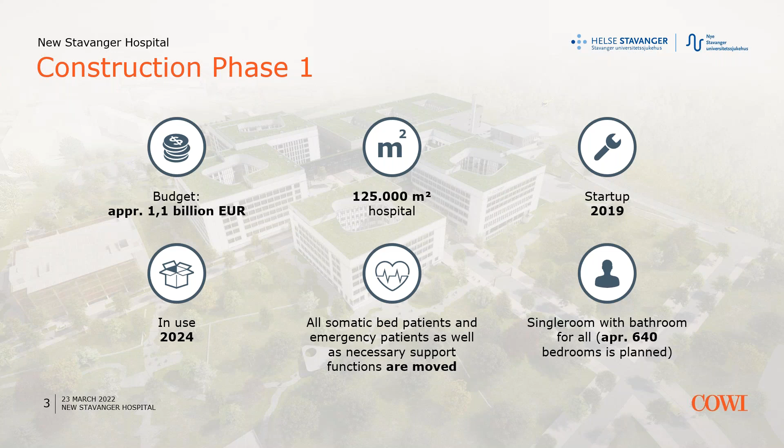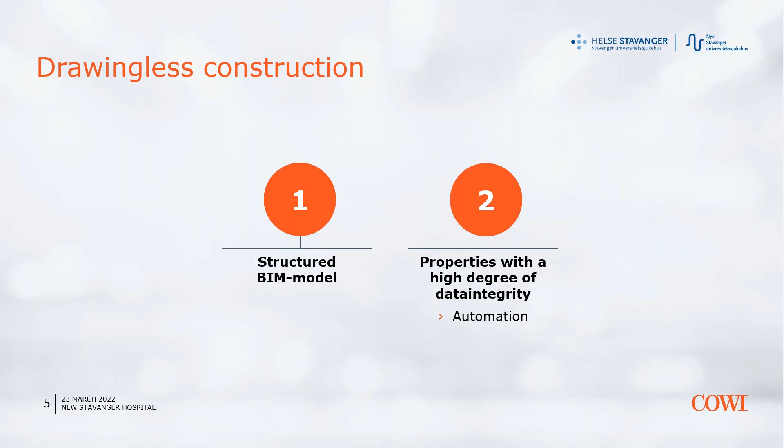Here's a drone picture of the building site, how far we've come by now. In the project we have a very structured BIM model, and we have a lot of properties with a high degree of data integrity. That helps us a lot with automating a lot of the processes in the project. We can filter all objects on certain parameters. So this is an example of data integrity for the control area. The whole building is split into control areas, which are part of a floor. So here we can see all the objects which are inside one control area.

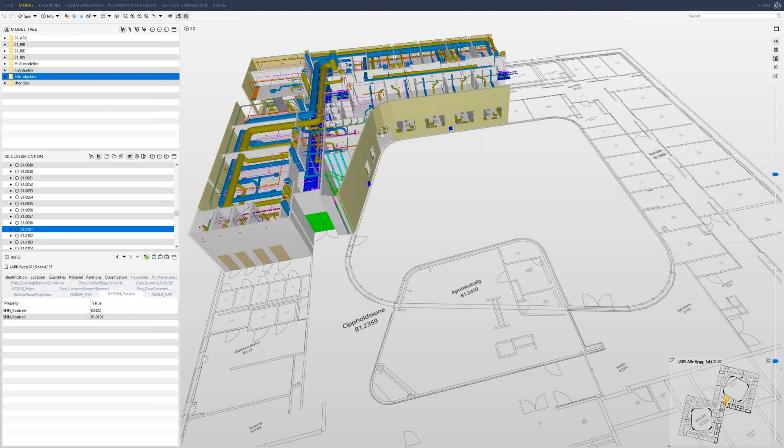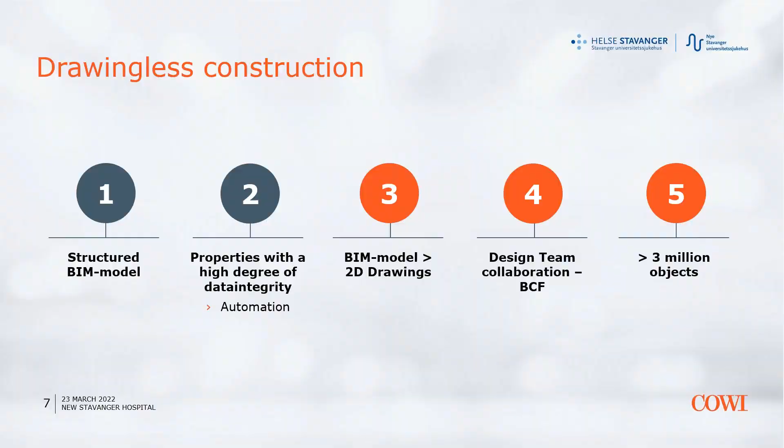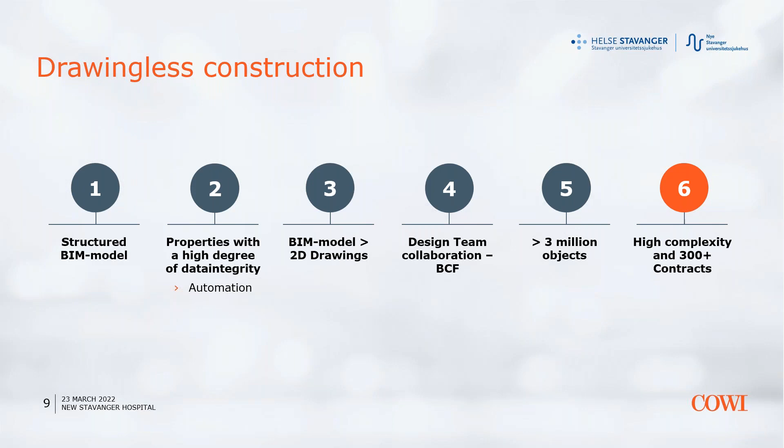The BIM model in the project has a higher rank than the 2D drawings, and the design team collaborates through BCF. And the project has more than 3 million objects. So you see here, there's a BIM model with all the buildings in the project. It's a huge project. It's also of high complexity due to more than 300 contracts, where 150 of them are affecting the construction, and there's another 150 for medical equipment. Here's a picture to illustrate some of the complexity, and this is before the electrician got started.

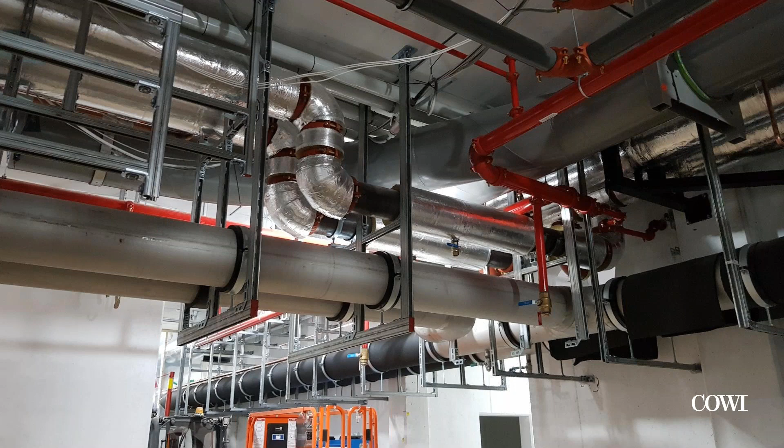We also use laser scanning to check deviations for openings, etc. And here you can see what looks like the concrete floor here is the scan, and the green piping here, that's the BIM model. And as you can see here, there's deviation between where the opening for the pipe is placed. So therefore we can check these deviations before we mount the pipes in place.

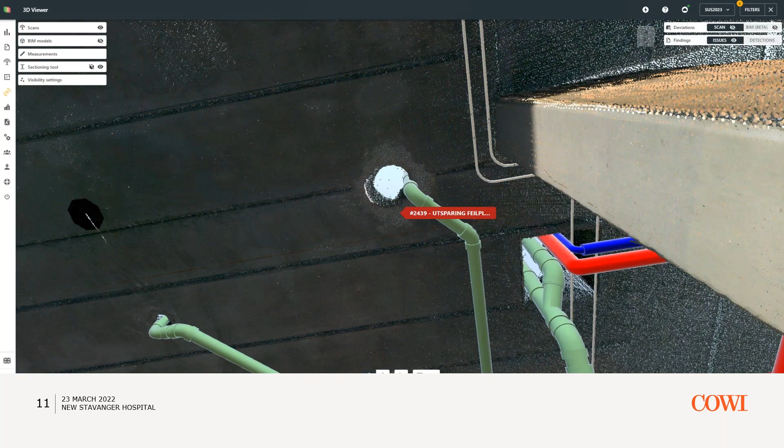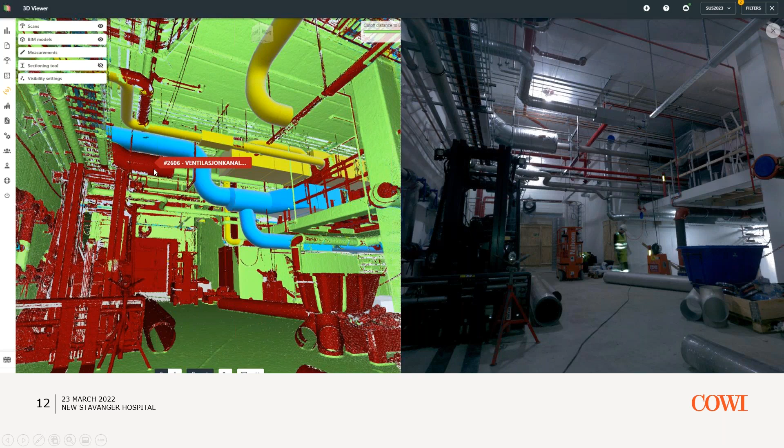Another example is for installations, where you can see the ventilation channel here, which is modeled in blue, and the way it's placed in the building site is here in red. And here on the right side, you can see the picture of the pipe. So therefore, we can easily check whether things are placed according to the model or not.

So, Eirik, you will continue. Thank you for the presentation, Henrik. I will start with some general comments about the things we're going to discuss today and how they all tie together. So I think you can see my screen now.

So first of all, like you probably understood, this is an ongoing project. So many of the things that we will go through today are things that have been developed throughout the project and implemented on the way, so to say. So we are still learning, and it can still be even better. But I think the key things to take away from this, or the main points, will be of interest to many of you, hopefully.

So what we have seen is that, especially in projects like this, which I would call high-level BIM projects, where the ambitions are very high with regards to the model, it's very important to have efficient workflows. So what we have struggled a little bit with, I would say, is that we had some workflows that probably worked in the past, but in these kinds of projects, they can easily create a lot of friction, so to say. So we are used to having our design models up to date all the time, but it's important that the rest of the workflow also reflects this.

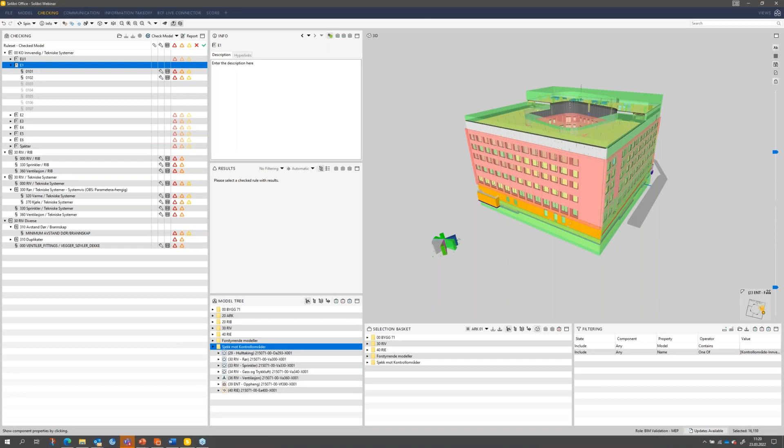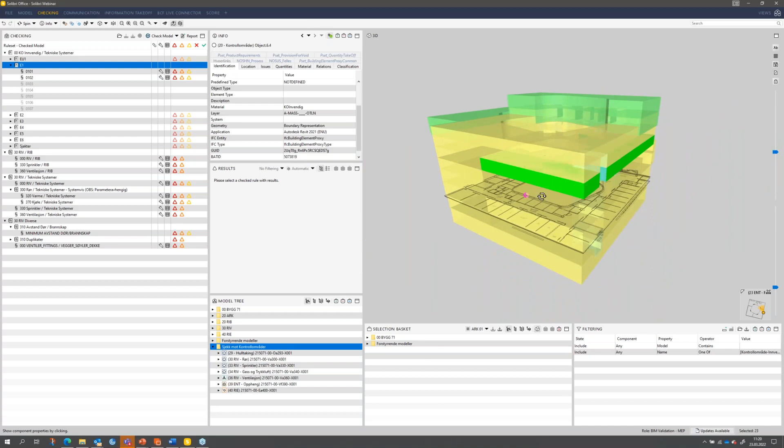So this is one of the buildings we have in our project. For this demonstration, I have removed some of the files, so hopefully it works for the demonstration at least. I thought first we can just have a look at how this control area model looks. As you can see, it basically divides the whole model into smaller segments. One floor is typically 2 horizontal areas. So this is what goes into this checking here on the left side.

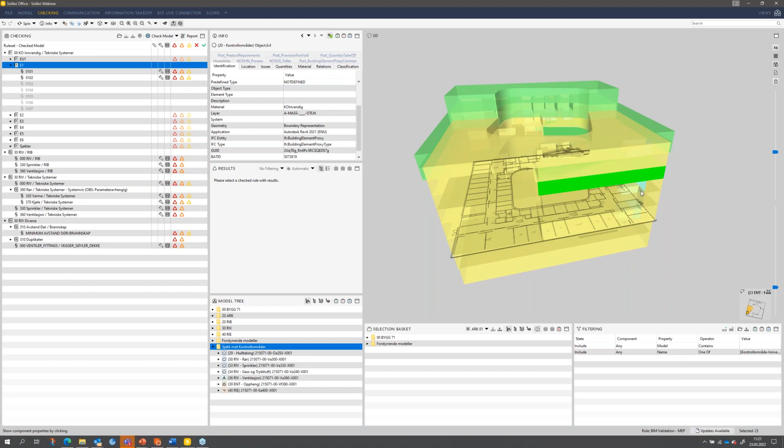So on this top bit here, you can see it's divided into levels. Every level has listed all the control areas for that level. And this whole setup works, like I mentioned, on all the buildings, not only this particular building. And how exactly does that work? Well, first of all, if we look at this particular control area, we can see that it has a name or a number here. And in this model, the first bit before the punctuation is only relevant for this particular building.

But the last bit is the bit that is sort of generalized, and that is the same system for all the buildings. So by using only that bit in these checks, you have a setup that works on all the different buildings. That could also be completely different projects if you have a system for it. So with that said, all the things you can see here are just very simple standard collision checks between, on the one side, this control area model, and on the other side, all the models we want to extract objects from.

So the last part, that was something that gave us a bit of a headache, because you want to be able to choose on each building which models we want to include in the checks. But at the same time, you don't want to have to go into the rule set and change the rules for each building. So you want to keep that one rule set, so it's easy to maintain.

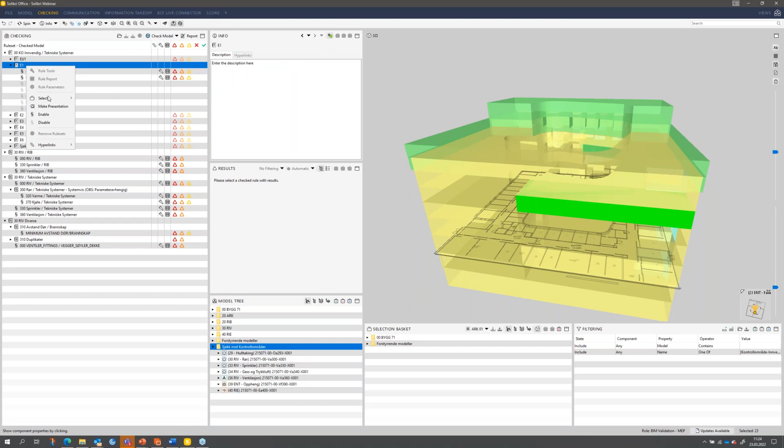Here you can choose one, you can choose many, or you can choose a whole floor. It's very flexible. And if I just select the results from this check, I get all the objects within these two control areas. The gray ones here don't exist in this particular building, but they exist in the other buildings. And like I said, none of the object parameters here, it doesn't matter if they are right or wrong, they will be included in these results. So this step alone is something we have used a lot to verify the parameters, for instance.

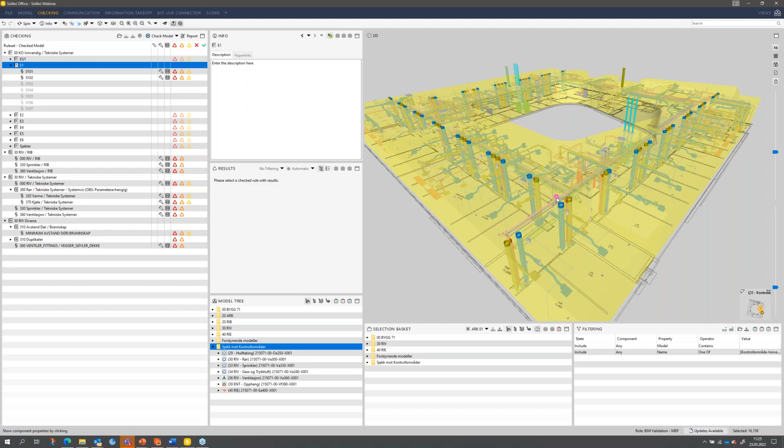And we have used information takeoff, and we have actually done quite a lot of checking in Excel to do that. But you can also use it to do material takeoffs, but then you have to make sure to split objects between the control areas in the model. But the most important or most interesting thing for you guys, I think, is to see how it works if you want to combine it with other kinds of checks.

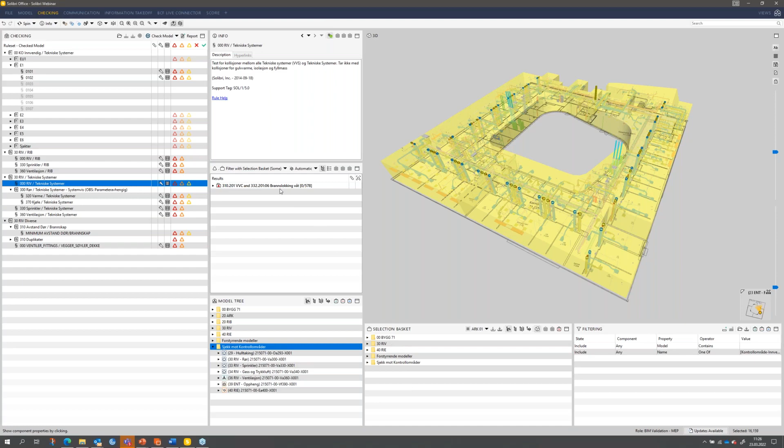So, for instance, here we have a setup with different kinds of checks. This particular check is a check between all ventilation and piping against all the other technical systems that are included here. So basically electrical and other systems, so to say. So if I want to just get all the collisions within these two control areas, I select this check and I go here into the results and I filter the results with the selection basket. By selecting this first step, they are put into the selection basket. So if we filter with the selection basket, you can see that all the results are filtered out.

This one is very general. It takes all the collisions. So even this is quite a lot of collisions here. Personally, I use this a lot just to walk around in the model. I identify the collisions and then I go back to Revit or whatever and fix the issue there.

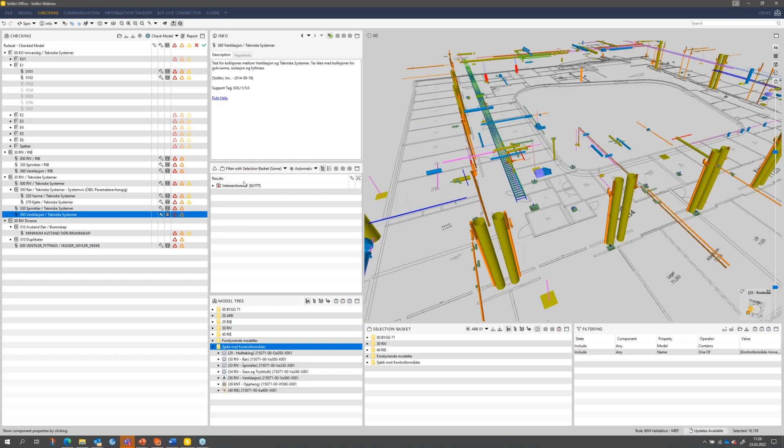But even more interesting is that you can also split it up. So if I only want to look at collisions between ventilation and other technical systems within these two control areas, I can go down here and select this check, which is specified to only show the ventilation. So that makes it really easy to just focus on what's important to you. So if you work with the ventilation, you can use this check and you don't need to see anything else.

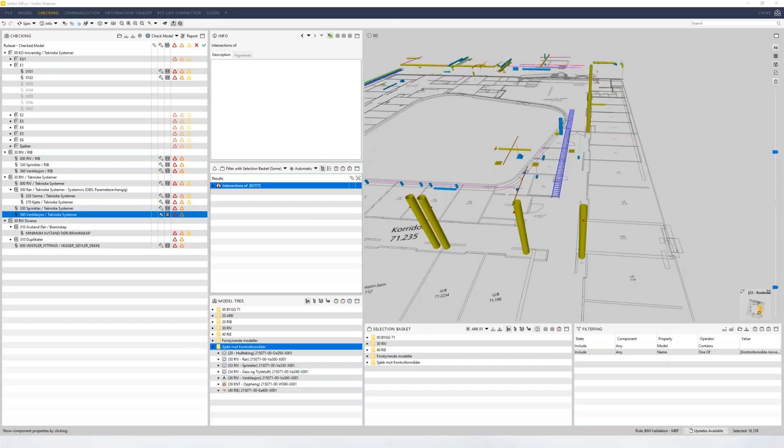So in this setup, there are not a lot of exceptions really, because at the same time you want to be able to trust what you see. You don't want to be asking questions, is it showing everything that you expect it to, etc. So there's just a few exceptions, but apart from that, it's just a collision check. Since we have a huge project and ventilation is in a separate file, it's just the ventilation file here, and it checks for collision against the other files. And it's also based on the same category, so that it works in the same way. If you include files in the category, they will also be included in these checks.

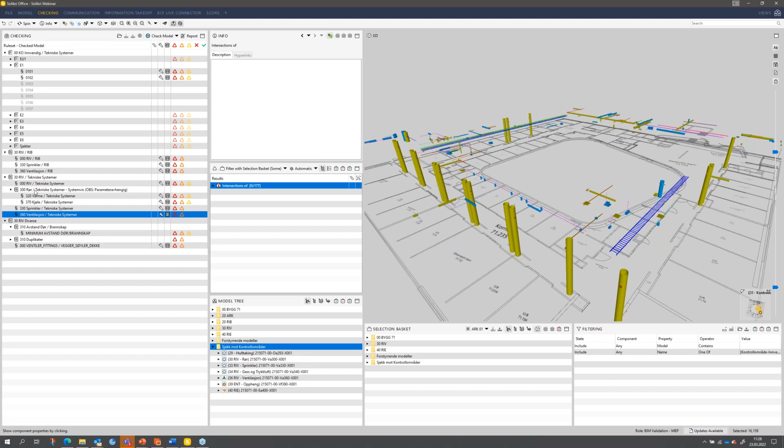And like I said, you can basically combine this first step with any other check. So this was typical collision checks, but it could also be other types of check. First, before I go further, I just want to mention, we have one file where all the systems that don't have a unique file end up, and then of course, if you want the same sort of setup, you have to base it on some kind of parameters.

And this is following the Norwegian numbering system, so that's probably a bit different in your country, but try to make it as general as possible, and then you can make the same sort of setup here. So here you can easily filter out all heating or all cooling within the same control areas. But as I said, it also works with any other kinds of check.

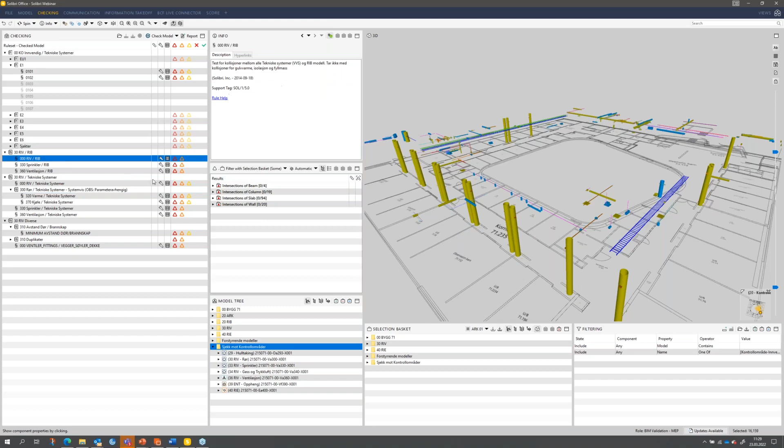So if I want to check for all collisions between piping and ventilation and columns and walls, all I have to do is select these like that, and then I get all these collisions. As before, if I just want the ventilation collisions, I select this, and then I select the columns and walls, and I only get these.

In Solibri, the intention with this setup was to go through and accept and reject each collision. We don't actually use that because we clear out all the results every night, and then we add the rule sets again. And this has two purposes. First of all, our models are huge, so we want to clear out every unnecessary information that is just kept.

So we clear out all the results, but at the same time, we also add the rule sets again each night. That means that if we make a change one night, it will be automatically included the next time it runs. So this is something that Morten will talk more about in a bit.

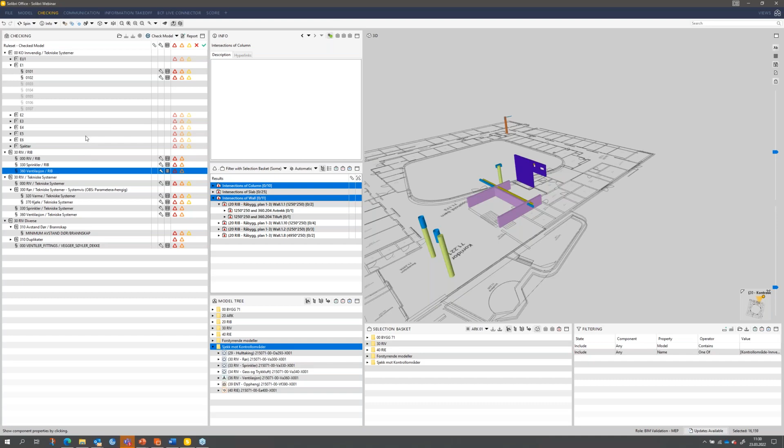But both these two examples were standard collision checks. It's very useful, and it's something that we use a lot, and we update using Autorun, and we distribute to all the project members. So it's not something that everyone has to run manually. But it also works with other kinds of checks.

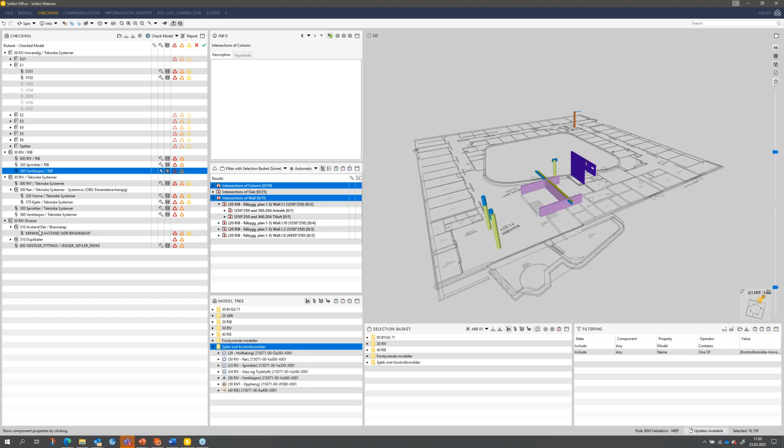So just to take one last example here, you can also use it, for instance, with a check like this, where we made a check to see if the fire hose cabinets are too close to the doors, because we don't want the doors to block the fire hose cabinets.

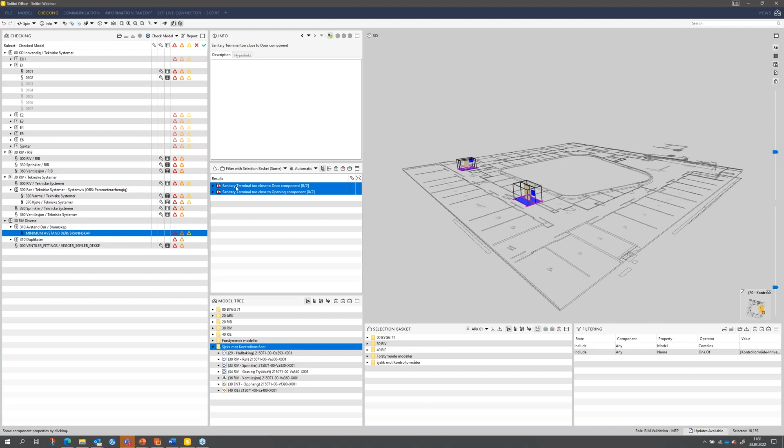So if you just want to see those results within these control areas, you select this check and filter with selection baskets. But if I don't filter and select again, you can see you also get the results from all the other control areas that get results from the check.

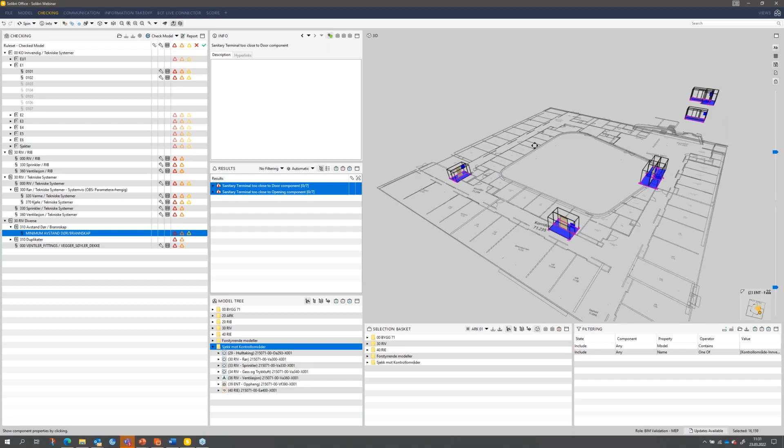So I think that was basically what I was planning to say. So then it's up to Morten to talk a bit further about how our setup is in Solibri Autorun.

Thank you so much, Eirik. I am giving the floor to you, Morten. All right, thank you very much. Yeah, now you can see my presentation.

Very good. All right, so now I'm going to take you through Solibri Autorun and how we use it on this project. So Autorun is a tool in Solibri that allows us to automate several sequential tasks. Anyone with a Solibri Office license and a fairly updated Solibri version installed can use this. So what is the motivation behind using Autorun?

By using Autorun, you can save time by running tasks in the background, maybe of both your desktop and your mind. You can save computing resources by running it outside of office hours. You can save your colleagues from all having to do the same boring tasks by processing in a central hub and distributing the result files to the project members.

And you can automate creation of issues based on the checking results and the status set on each result, as if they are rejected or accepted, and so on. Also, you can save yourself from being bored to death if you don't like clicking the same buttons every day. So what can Autorun be used for?

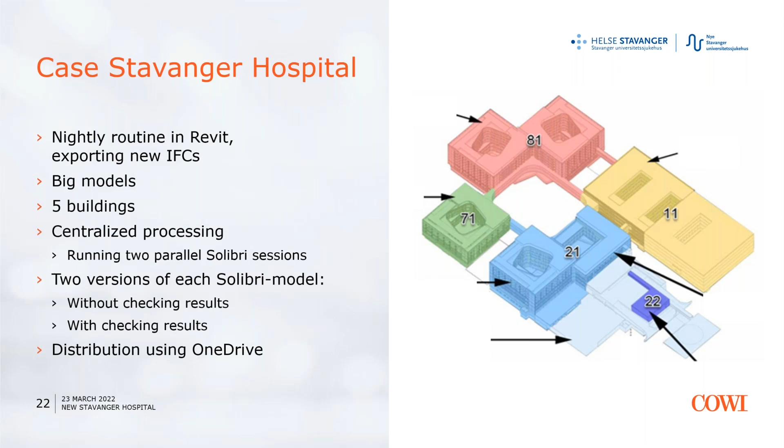Here, the model we saved earlier is opened, the rule sets are added and the checks run before it is saved and closed, and then distributed again. This time it's given a different name with checking results.

And so the end result is this: the IFCs are updated, the models are checked, and all the users have to do is open the models locally on their computers. Because we've set the OneDrive sync setting on the Solibri models to always keep on this device, it will automatically download when a new model version is available, so they don't have to wait for it to download when they want to open one of them.

The system turned out to be especially important during the home office periods, because updating one IFC manually could easily take 1 hour due to the slow transfer speed on the VPN we had to use.

In the beginning of the project, the BCF files were sent back and forth, as Eirik mentioned, through mails and issues, and they were placed on many destinations. It was a problem to know which ones were solved and which were open, so we needed to find a master solution, a BCF server, to store all the issues.

Since the design team collaborates through BCF, we have for now more than 12,000 issues in the project. So for the past 2 years, that's approximately 30 a day. There's more than 200 users, and the BCF server allows seamless collaboration across software like Solibri, BIM Track, Revit, and Tekla.

We had some main challenges when setting up the project. One was that the BCF format doesn't support custom parameters, and also that the same parameters have different names across the software. We had trouble keeping control of more than 12,000 issues, and the softwares also had trouble handling those large amounts of issues.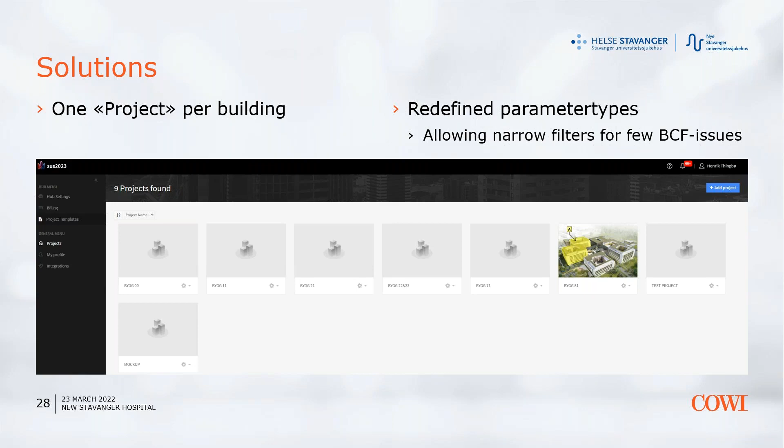We needed to have multiple control areas attached to the issues. So this way we mapped the parameters we use in this project to the parameter names used in the BCF format.

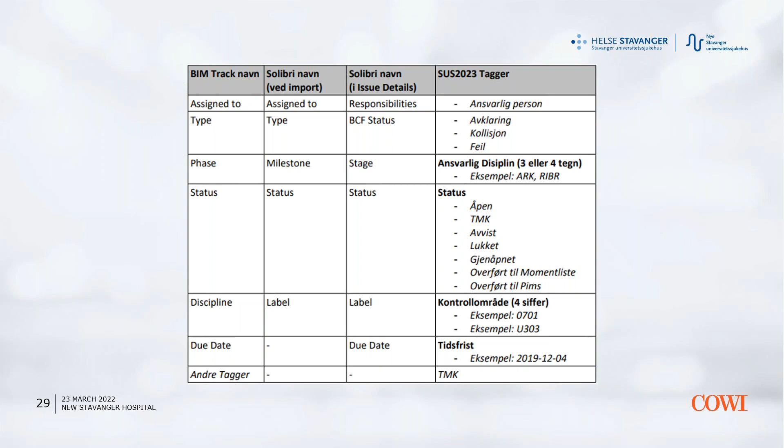I'm going to show you some of this live. In BimTrack, we are allowed to define all the values that are used in the project, which is good because then we have high integrity of the data, since we can decide which parameters the designers are supposed to use, compared to if they use free text fields and free text values.

It's more difficult to filter out when more than 200 users are trying to do the same thing. So here we can edit and add values to the different parameters, and we can also add new categories of custom tags. But the custom tags don't follow the BCF format, so they won't be shown in Solibri, but we still use them in BimTrack. I'll come back to that.

Here is the BCF Live Connector from Solibri. We have tried to be very clear with all the designers that it's extremely important to add all parameters. So we had a set of mandatory parameters that everyone needed to include, because if we don't have mandatory parameters, the filtering will be difficult, and you'll have too many issues in your filter, which will take a lot of time for the different software like Solibri to synchronize.

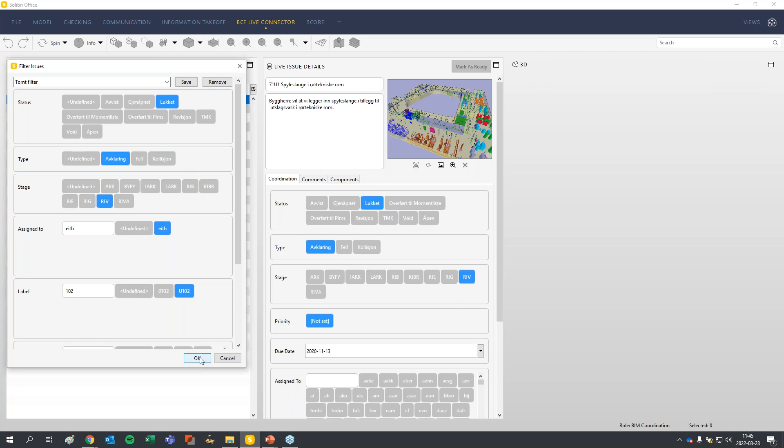We said everyone needs to add a status, and all issues need to have a type. Everyone needs to have one responsible discipline, which is called stage here in Solibri. Every task needs to be assigned to someone, and we also need to add which control area this issue is about. When you have all these mandatory parameters, it's easier to filter out only those issues that you're interested in.

So now when I add that filter, Solibri will start importing 5 issues at a time, and for this particular filter we will get 11 issues. The more issues you get, the heavier it will be for the software to work, so that's why it's important to keep the filters low. This allows much better filtering options.

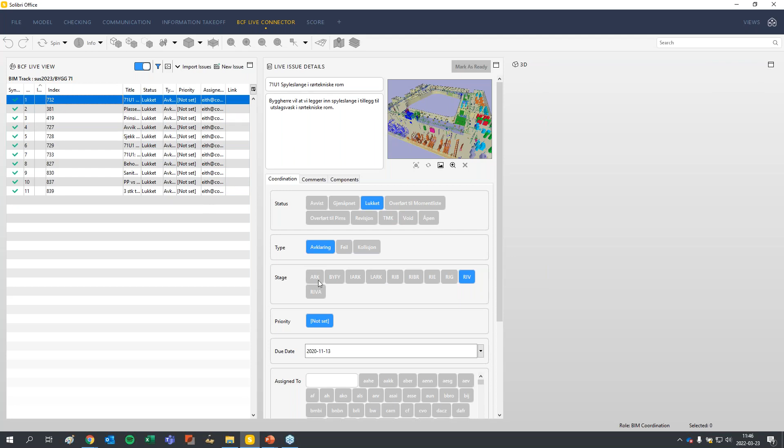We'll do it this way, and in Solibri you can see through the issues that it's possible to search for parameters. You can add several parameters if you want in your search, and here you can change the issues.

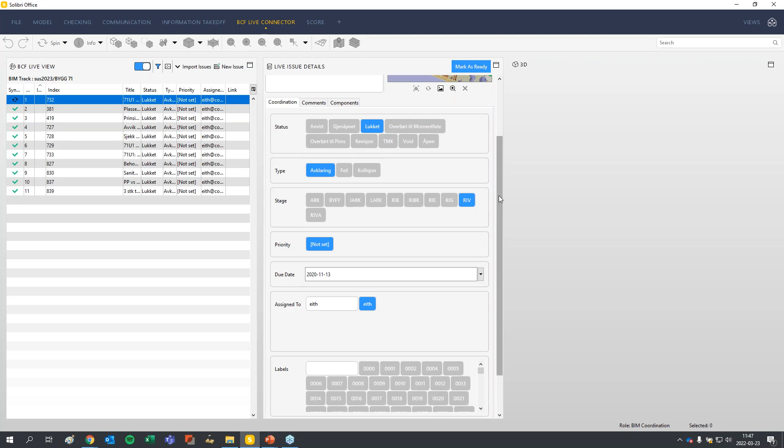I'll show you also how we used Solibri for what we call the multidiscipline model control. For each control area, we have one multidiscipline model control, and one control area is approximately 1,000 square meters. All the disciplines prepare issues before the meeting, and they all tag them with the status TMK, which is Norwegian for multidiscipline model control. After they all synchronize to BimTrack, the meeting responsible person will go into BimTrack and search for the control area and for the status TMK, and he will add the custom tag TMK.

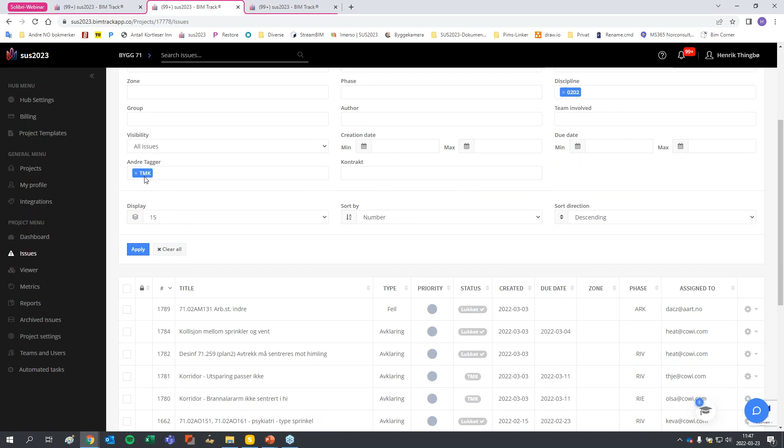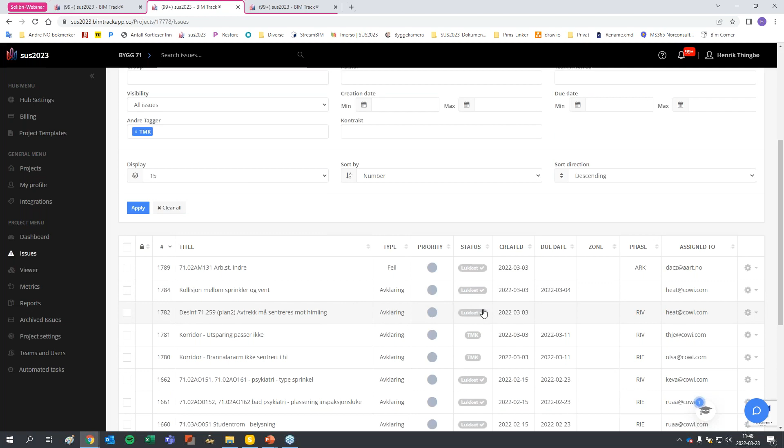That allows us afterwards to change the status from TMK to other statuses, like closed, and we will still be available to search for TMKs from the custom tag and other tags. So here I search for control area 0202 in building 71, and here you can see which issues were a part of the multidiscipline control, and which are closed and which are still open.

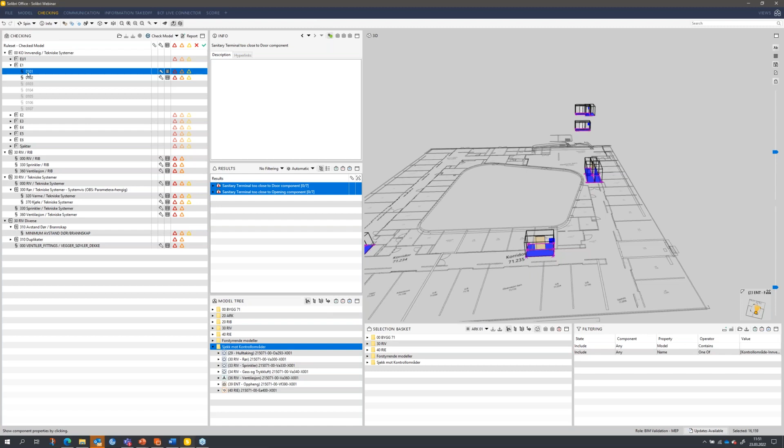That's actually the best part of the setup, is that it's really simple. So it's just a bit slow. If it works, I can show you. In a bit, while it's loading. So it's just one side: name of parameter contains this bit, and on the other side, this category. Let's see.

You can see how simple it is. So this was just for the demonstration. Just ignore this last bit, but it's just if that's the model name of the control area model, and if the name of the control area contains this general bit, then it's included, and on this side, if it's included in the category. So super simple. Thank you, Eirik, you make it sound simple. Thank you, but it is quite simple.

I have another question. Okay, now I'm receiving a lot of questions. I have a question for Morten: did you perhaps find an option for grouping IFC files when loading them automatically with Autorun, the same way as you can assign a short name and discipline, or is that done manually? No, we can assign a short name, but we can't assign a category. That's actually one of the features I wish they would include in Autorun. So you have to sort them by short name in that case, and that's not very practical. So we have assigned them categories manually. Okay, note taken, thank you.

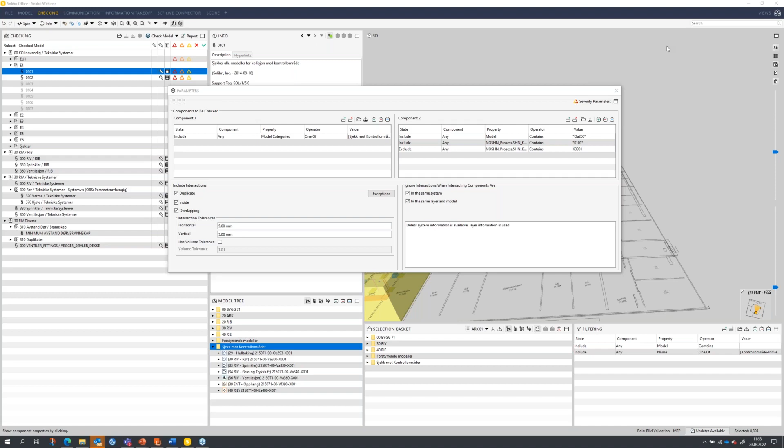There's a question for Eirik. Were there special volumes included in the IFC files, and was Solibri used for clash or Revit? I'm not sure if I understood. The volumes here, it's a separate Revit file, and it's mass objects in Revit, which is exported to an IFC file. If that was the answer to the question. Yeah, thank you. I hope we answered your question.

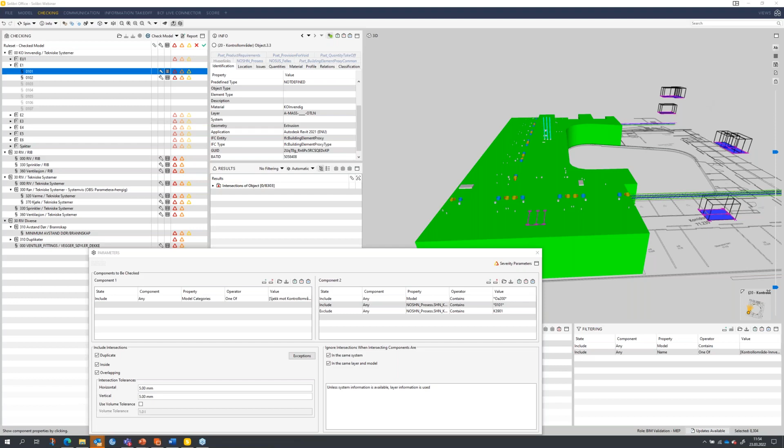For Henrik, you showed a software tool to check if the wall openings are placed correctly together with laser scanning. Which software did you use? Software called Imerso, which is pretty brilliant for the task. Yes, I can also send the link to Imerso to our webinar page on the website. Yeah, you can also see it in the presentation, the logo on the pictures. It's recommended. Yeah. Thank you.

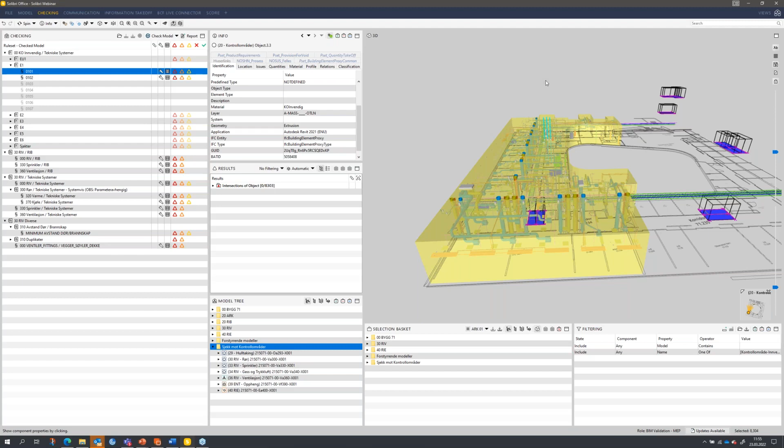Sorry, I'm rushing, but we're almost out of time. So we have final questions. How do you create the horizontal areas, Eirik? We do it in Revit. So you go into the mass editor and you draw them. We have drawn it manually in this case. You just have to set the boundaries, and we have based it on the fire zones, so to say. That's the main rule at least for how it's split up. But it's done in Revit, yeah.

Okay, thank you, Eirik. Henrik, there is a question. How much time would you estimate that you have saved going from file-based BCF to a server solution? That's a good question with no good answer. But if you ask how much frustration you have saved, I think it's a lot. It's difficult to say, but the point is that you have control of the BCF issues, and that's the best part of it. So you don't need to ask back and forth, and it depends also on the complexity of the project. There's a lot of people involved, a lot of disciplines, which makes it almost impossible to keep track of the BCF issues without a BCF server.

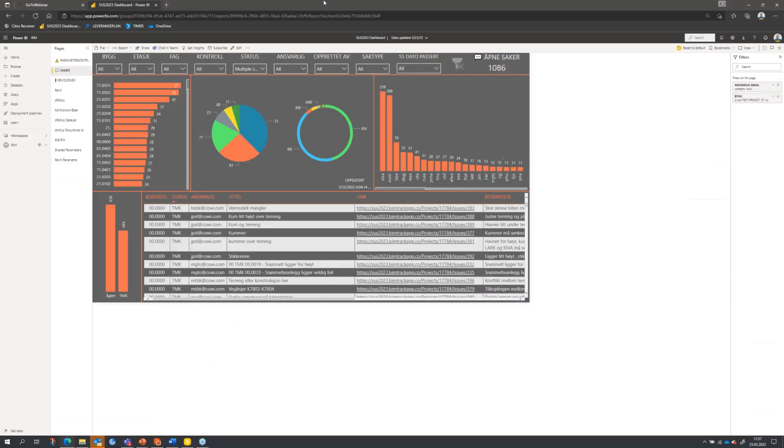We have an interactive comment from one of the attendees that in the newest Solibri 9.8.12 you can add categories, which is great to know. Yes, thank you so much for this comment.

Do you also use ITO in your process, and could you give some examples? We haven't set that up, mostly because we use the checking results, as Eirik showed, to sort out everything in the control area before we do an ITO. So that wouldn't really work with Autorun. But we could set up an Autorun where it would open just one IFC, for example only the ventilation model for one building, and then do the ITO from there.

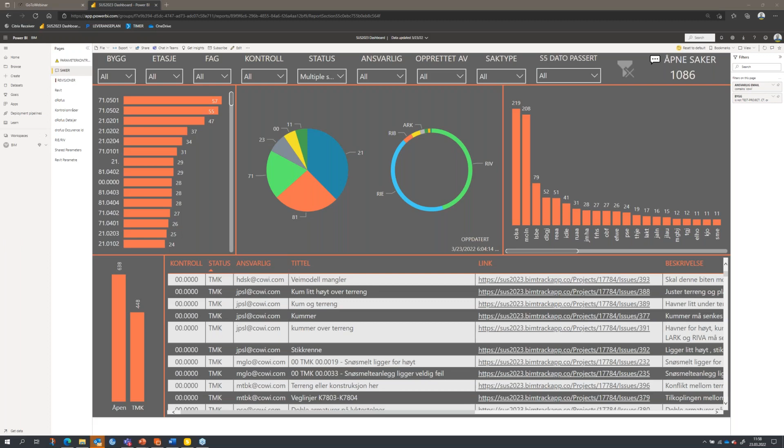Then all the control area parameters would have to be correct for the results to be correct. But it is very often correct, so we would get pretty close by doing that. And after doing the ITO, you can filter a lot in Excel to filter out the control area that you're interested in. So that would work. Okay, thank you so much, Morten.